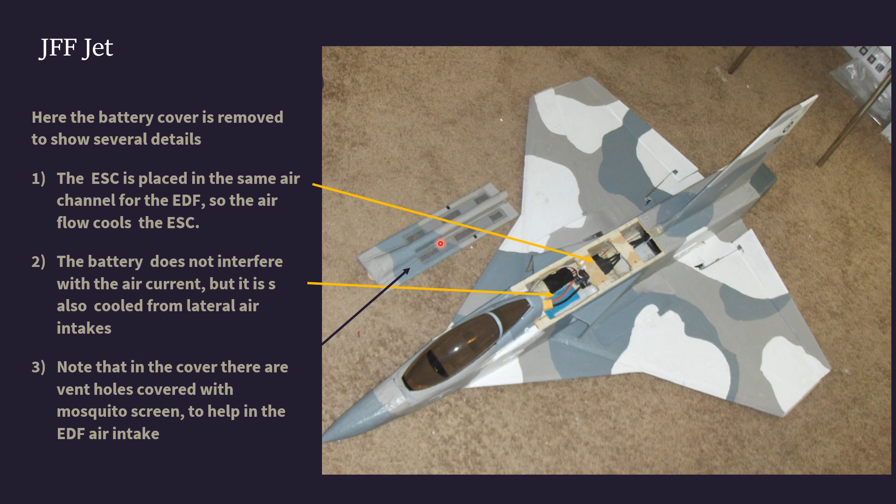Note also that in the cover there are vent holes covered with mosquito screen to help in the EDF air intakes. I designed the cover so we can have a complete access to all internal parts. All covers are fixed with screws, except the battery cover, which is kept in place by a small magnet.

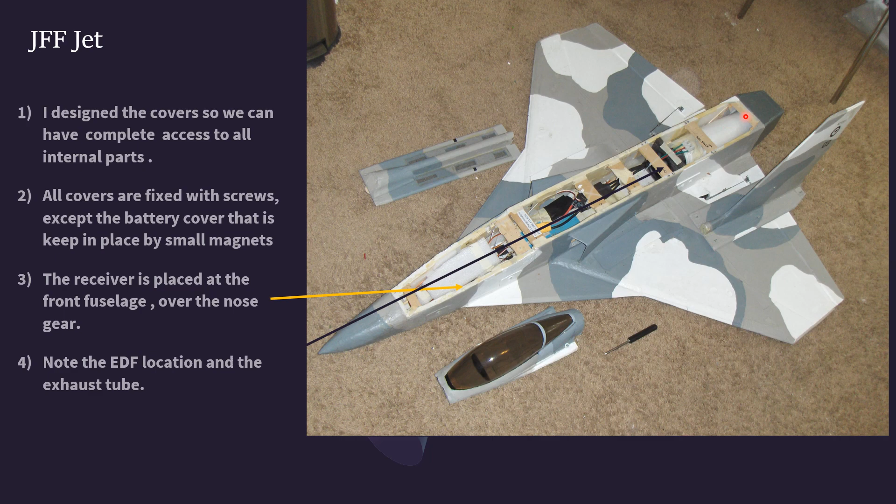The receiver is placed at the front fuselage over the nose gear. Note the EDF location here and the exhaust tube. Here is a view of the receiver. The receiver is separate from the nose gear, which is down here, using layers of soft foam. The fuselage sides are made with 10 millimeter foam.

Note that the EDF is located the nearest possible to the CG, which is the center of gravity, which is around here. And the exhaust tube is formed from paper covered with transparent packing tape. This produces a light and a strong tube. Note that a soft foam seal is provided at the EDF entrance to prevent air being suctioned from the rear part of the fuselage.

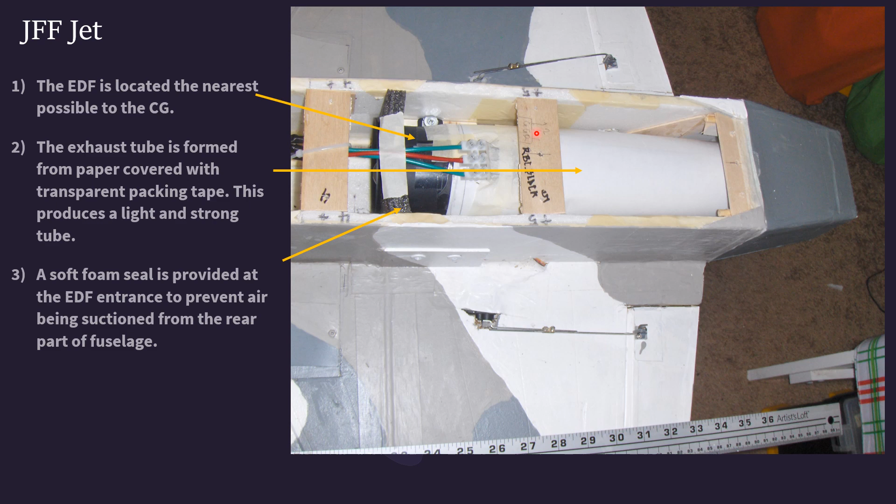The canopy is supported at the front with a wood slide and with a screw in the rear part. By the way, I use a canopy from an F-16 80 millimeter, bought from a supplier.

Here is a view of the landing gear setup. I have to say that I use the landing gear only for the takeoff because the wire is soft and twists easily during the landing with the gears down. So I do belly landing without any problem, except some stain from the grass.

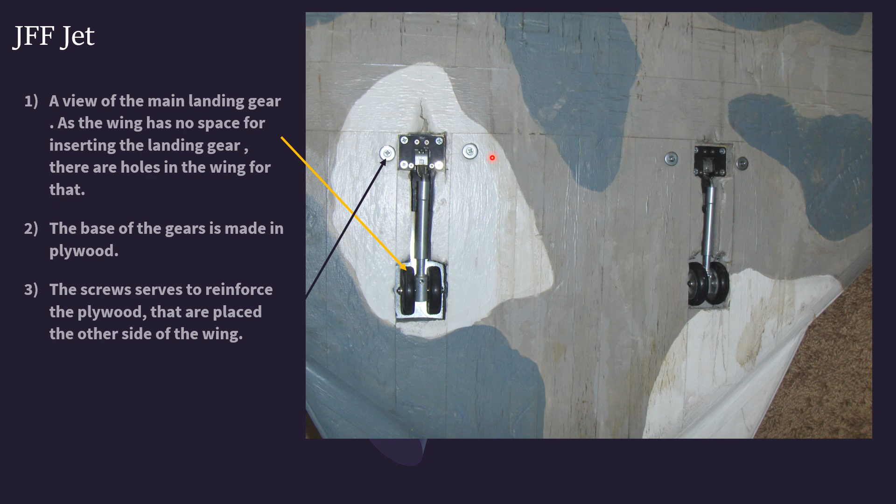This is a view of the landing gear. As the wing has no space for inserting the landing gear, there are holes in the wing for that. The base of the gear is made in plywood, and these screws serve to reinforce the plywood that are placed at the other side of the wing.

Here is a view of the nose gear. In this case, it is not directional, but the takeoff distance is so small, about 5 meters to 7 meters, that it is not required. The nose landing gear is mounted on plywood, supported at the sides by the fuselage with plastic strip. We will see it later. This plane has at the moment more than 40 flights, so it is not a new plane, as we can see.

Note that the flexible painted plastic strip serves to cover the two main landing gears in the upper part of the wing. Note here also that the main wing is made from 10 millimeter thick foam, but the secondary wing is made from 6 millimeter thick foam. Anyway, the same thickness can be used in both wings.

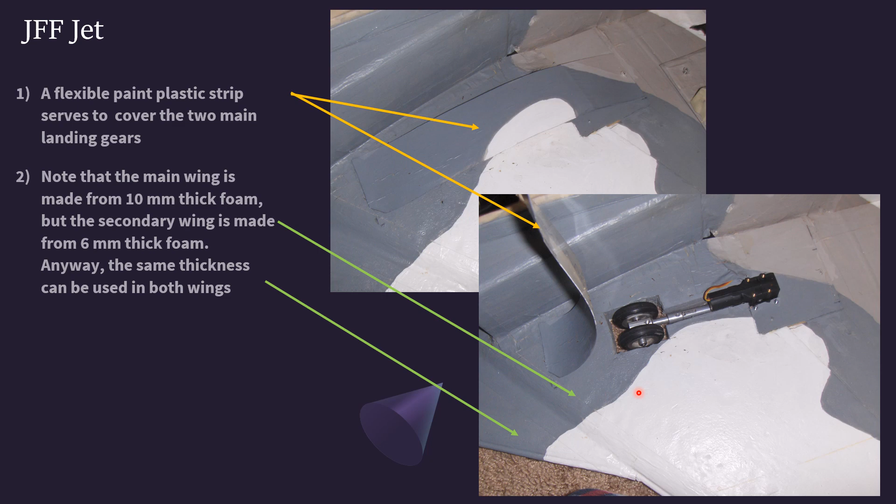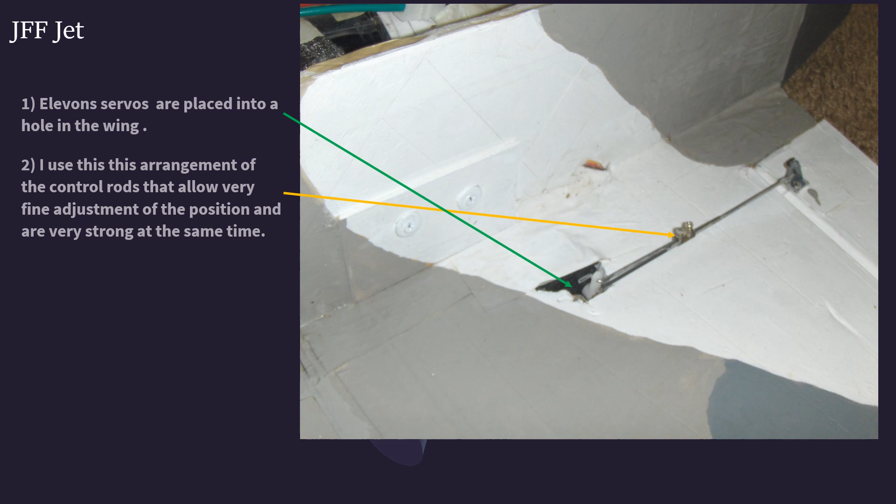The elevon servos are placed into a hole in the wings. I use this arrangement of the control rods that allow very fine adjustment of the position and are very strong at the same time. Here you can see that the exit tube is connected easily to the form or the contour of the fuselage. So it is necessary to have a fine finish at the exhaust cone.

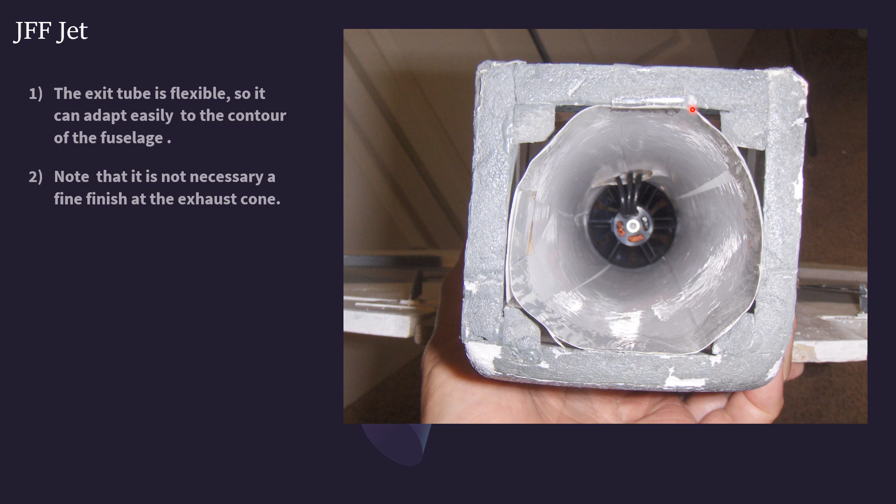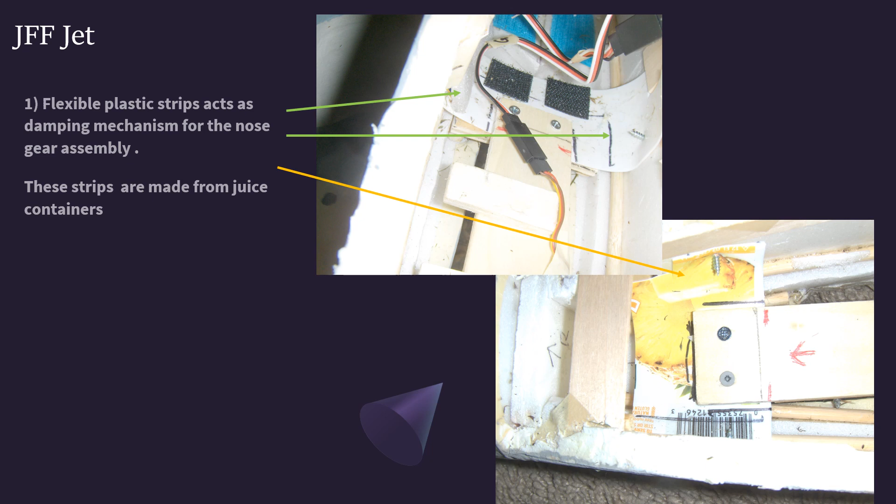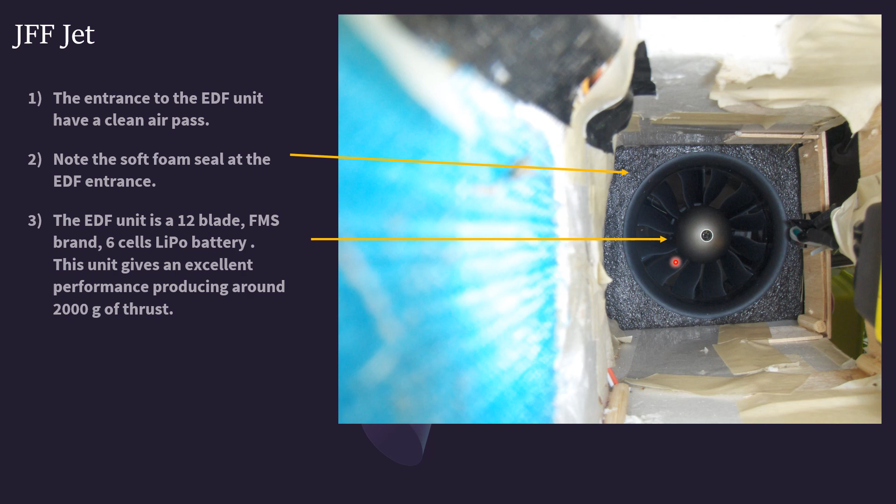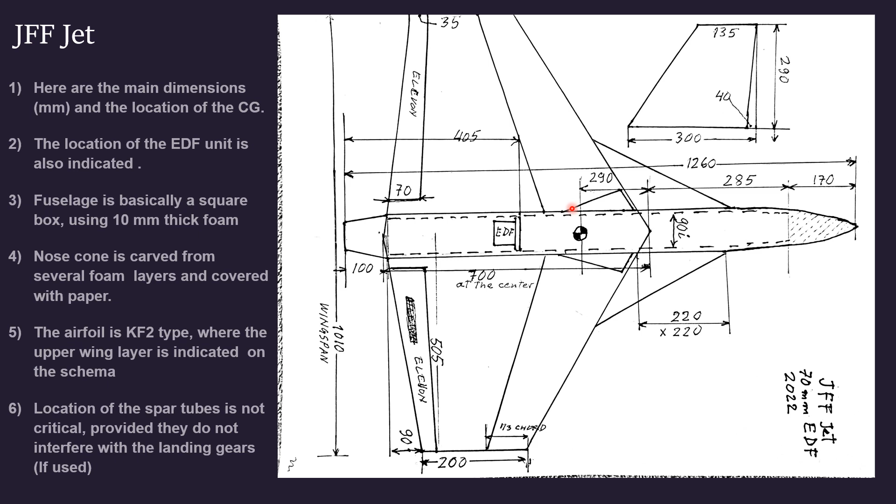Here are some complementary notes. First, the fuselage is reinforced along with 1/4 inch wood strips. Equally is reinforced the wing leading edge. The secondary wing leading edge and the vertical wing are also reinforced with the same wood strips. Spars for the wing are 10 millimeter round hollow carbon fiber tubes, but you can use also hardwood if you don't have these carbon fiber tubes.

It is important to establish the position of the main landing gear before establishing the position of the spar tubes. Landing gear axes are 50 millimeters behind the center of gravity. The entrance of the air ducts are over the wing, and the reason for that is that no debris can be suctioned during the belly landing.

I use Corona digital servos, metal gear, with torque at about 2 kilogram force per centimeter. Fuselage and wing are reinforced with paper tape, which is the covering tape that painters use, 2 inches wide. This is painted and covered with white glue as a finishing layer.